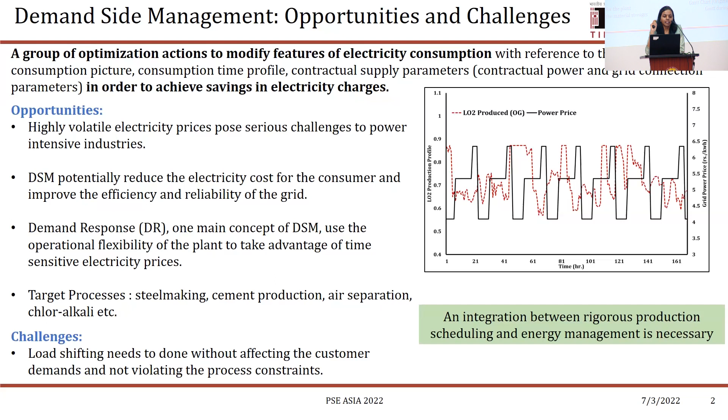So this is one of our works where we have done this production scheduling, and the major constraints in this scheduling model for any energy demand side management are allocation constraints, transition constraints, mass balance constraints, capacity constraints, demand satisfaction constraints, and energy balance constraints. And the main objectives are minimization of cost or maximization of profit.

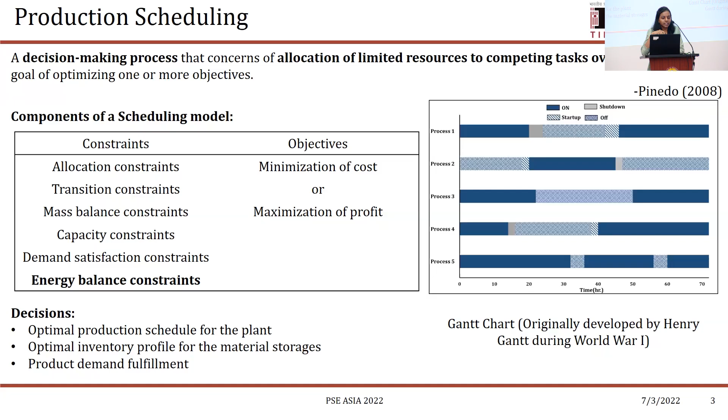The typical decisions that an industry seeks are optimal production schedule for the plant, optimal inventory profile for their material storages, and the product demand fulfillment. So in this paper, we have taken an air separation plant as a case study, where the products are gaseous oxygen, nitrogen, and argon, and liquid oxygen, nitrogen, and argon. The raw material air is free, but the major cost of the production is electricity cost.

The gaseous products in these cryogenic air separation plants are usually demanded by ancillary plants like steel plants, so they are directly catered using pipelines, but the liquid products like liquid oxygen or liquid nitrogen are supplied to on-spot demands of different customers via delivery trucks.

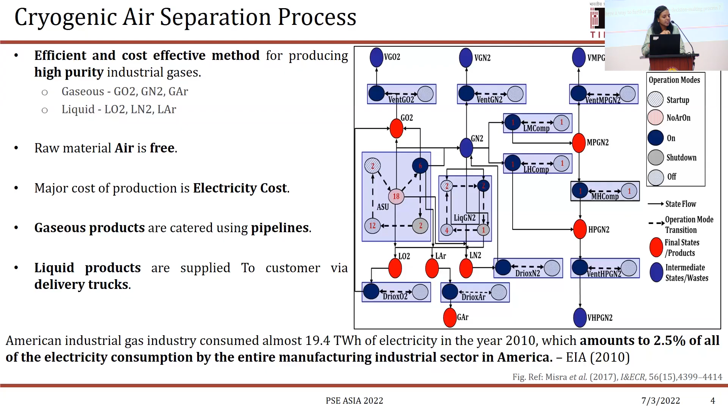So in this previous work, we tried to do this demand side management, and as you can see from this plot, corresponding to different electricity cost levels, the production profile was optimized a bit, and this is the schedule of different process operations in the air separation plant. But still, at some moments, the production is during the peak hours of electricity consumption, like this. So is there a way to further improve the decision-making processes in such cases?

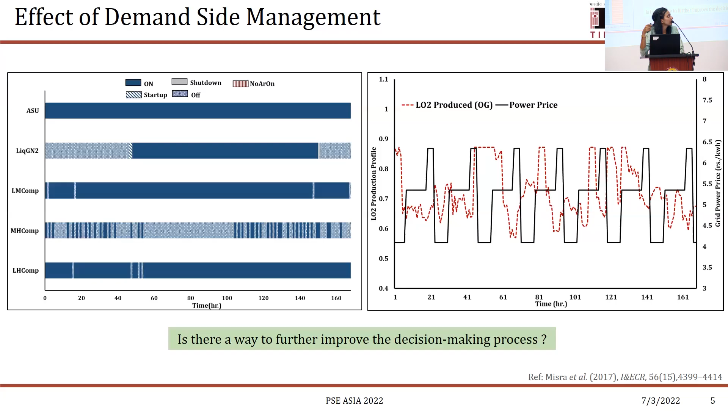And you can see that there is a reduction of 3.2% in the power cost with only grid power and only grid power with liquid utilization model. But still, this is all about the demand side management. Is there a further way to improve the decision making? Because still you can see at some peak points the production profile is still at the peak of the demand fulfillment. So basically this production profile is still dominated by the demand satisfaction.

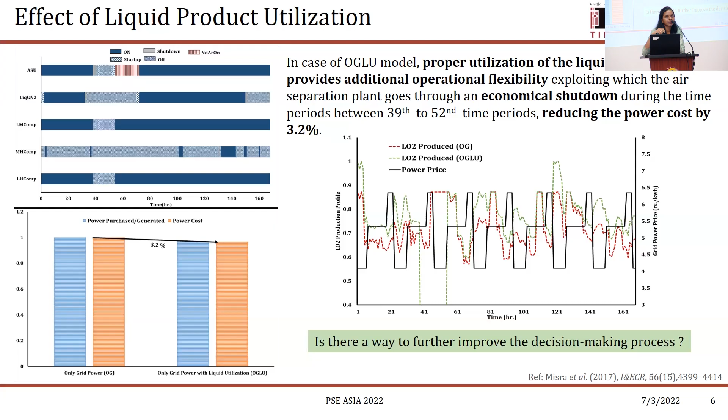So the next aspect comes as the integration of both the supply and demand side management. And here what has been done is that the supply side, that is the energy supply side, is being integrated with the demand side management. So on supply side, there are all the three things. Since nowadays industries are trying to become more green in nature, they are involving more renewable energy sources into their systems.

So they have solar concentrators, wind energy, and also deterministic cogeneration systems like reformer-based fuel cell systems, and battery storages to store the energy from solar and wind energy. And in addition, they do have a power grid also. So this is a kind of hybrid energy system that most industries have done, and some are also planning to do. But there needs a strong integration between these two, supply and demand, to optimize the production scheduling so as to minimize the total energy consumption.

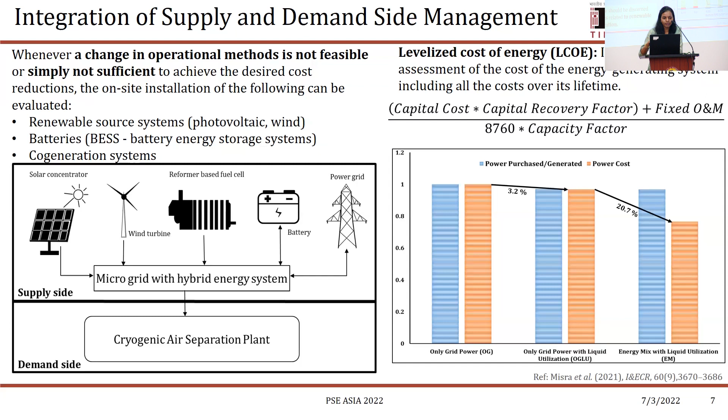And you can see that further from 3.2, with this addition of supply side, in our previous work, the results showed that there is a further reduction of 20.7% in power costs with this energy mix supply side model with liquid utilization. So this was the motivation of doing this, but this was all deterministic optimization, considering that solar energy, wind energy, and fuel cell all have deterministic output amounts.

So in this work, we further carried on to incorporate the uncertainty effects, and the major impact comes on the lithium-ion battery storages. As we all know, these batteries are quite capital intensive, around 35,000 rupees per kilowatt hour, the current cost in the Indian scenario. So from this deterministic result set, you can see that until the cost of these battery systems decreases 10 times to 3.5, they are not feasible to install into the plant in terms of their capital expenses. But this is again based on the deterministic results.

So we want to explore whether considering the uncertainties would impact this decision of battery size as well as battery installation. Therefore, the efficacy of energy storage should be discerned considering the uncertainties related to the renewable power generation. So that is where this integration again comes into picture with the uncertain impacts of solar and wind energy as well as the uncertainty in the demands. So the demands are also uncertain, and the solar and wind energy are also uncertain.

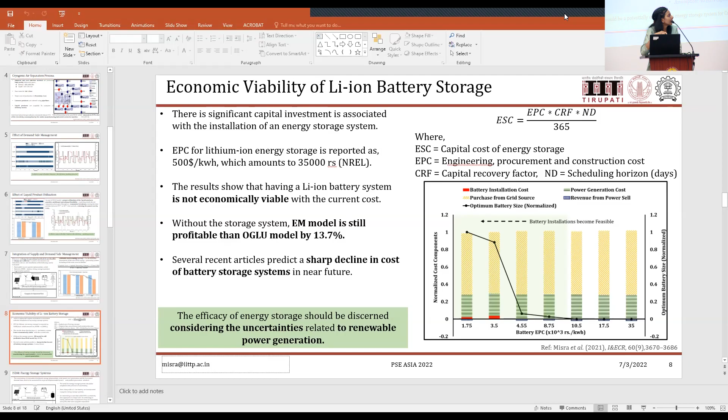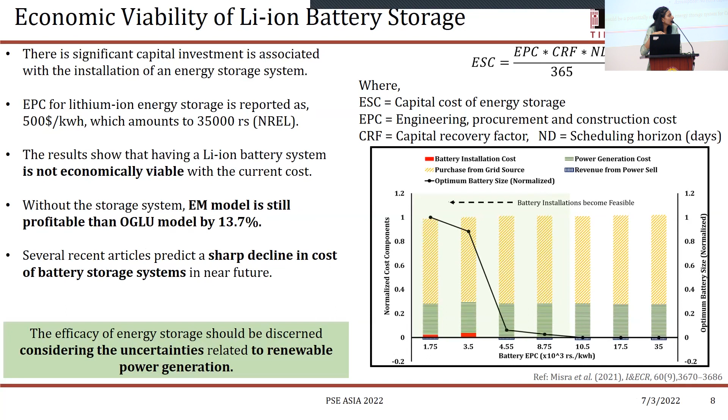Further, there is an augmentation of cryogenic energy storage, which is already present in the air separation plants. But the trade-off is that its energy conversion efficiency is very low, just around 50%. But the benefit is that no extra capital cost is required. So we have included that energy storage as well in the model. So now we have battery and cryogenic energy as storage systems in the model, and solar energy, wind energy and power grid as supply sources.

So the need for uncertainty is because of these two parameters, the renewable energy and the demand data. And the popular solution methods for incorporating uncertainty into production or optimization models are stochastic optimization and robust optimization. We also tried the most classical stochastic optimization method, two-stage stochastic programming with recourse approach, but it became intractable for a problem size like this.

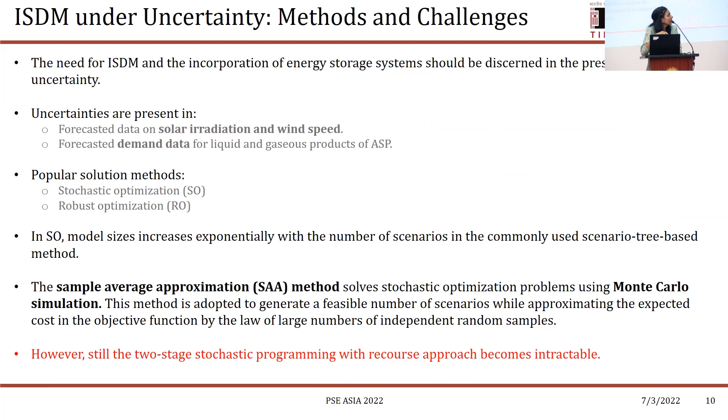So in this work, we have tried these two approaches, the stochastic simulation optimization and the scenario-based robust optimization. The key idea of stochastic simulation optimization, which I'll refer to from now on as SSO, is to solve a deterministic problem for each scenario set and then calculate the weighted average objective function.

Whereas the scenario-based robust optimization is an efficient way of dealing with the uncertainty in terms of the worst case of all the realizations of that uncertain event.

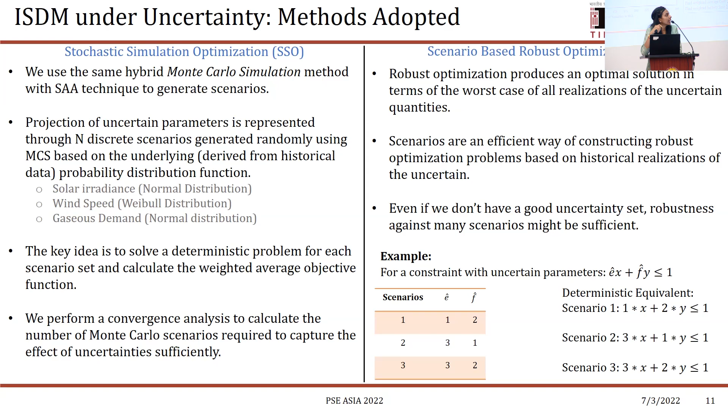So in the results, first we have done a convergence analysis to identify an optimal number of scenarios that should be constructed to appropriately define the uncertainty set, and in the range of 0.5% fluctuation, we get that number as around 250 scenarios. So further, for analysis, we chose 250 scenarios as an acceptable number of scenarios for solving the proposed model, and both SSO and RO were used for this number of scenarios.

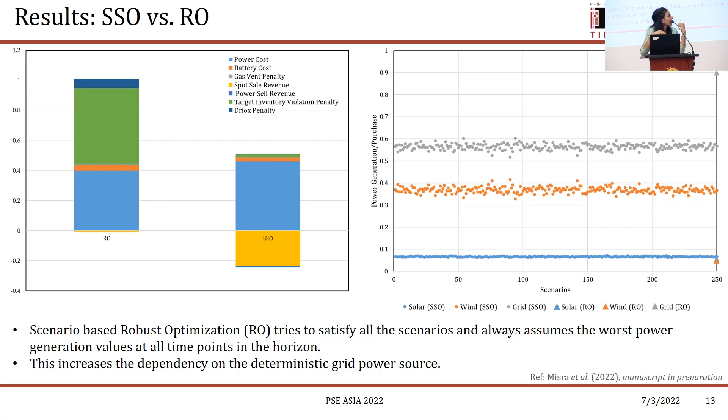But if we see this again in the figure on the right hand side, the liquid inventory profile, which is given by this orange line, we see that in the SSO model, the liquid inventory is quite maintained at the level of the target values, whereas it is only 30% in case of the RO model. So this yellow part, which is spot sale revenue, is being utilized as an opportunity cost by SSO, and therefore the power sale revenue has increased in the SSO model.

So in summary, due to unavailability of adequate power, the robust optimization is using the driox option, which is basically draining the liquid inventory and then converting it into gaseous form and using it as an energy source. And because of that, it is not able to cater to the on-site customers who come for the liquid demand. And therefore, it ignores the high revenue opportunity sales.

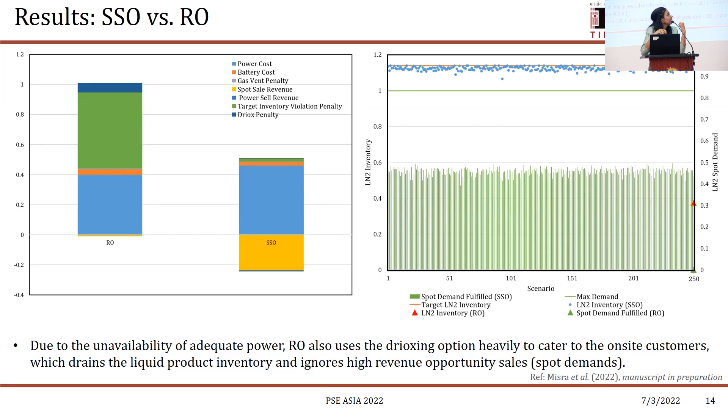And the second aspect to see here is cryogenic energy storage versus lithium-ion battery. So here we have compared the battery size for different cases. One case is that there is no battery at all in the plant, no battery energy storage system. The second case is a mean battery size, which means if we take the average of all the uncertain demands and uncertain energy sources, what is the deterministic mean value of the battery size?

The third one is the SSO battery, which is the battery size from the SSO solution. The fourth one is the battery size from the robust optimization solution. And fifth is the maximum battery size, which is the maximum size of battery in all the 250 scenarios of SSO.

So if we see the battery capacity and the objective function plot, we can see that the SSO model, the stochastic simulation-based optimization model, provides a 22% reduction in overall cost from the no battery case, and a 1.6% reduction compared to the mean case, which we call the value of the stochastic solution. So this SSO solution is much better than the robust optimization.

And when we compare the trade-off between CES and battery, the cryogenic energy storage and battery storage, we can see that CES was already low. It was around 17% in the no battery case. But when we have a battery storage system in place, its contribution to the overall energy consumption further decreased. So it is clearly evident from all these results that lithium-ion battery is a more suitable choice for energy storage systems despite their high capital cost, which was a result from the deterministic solution.